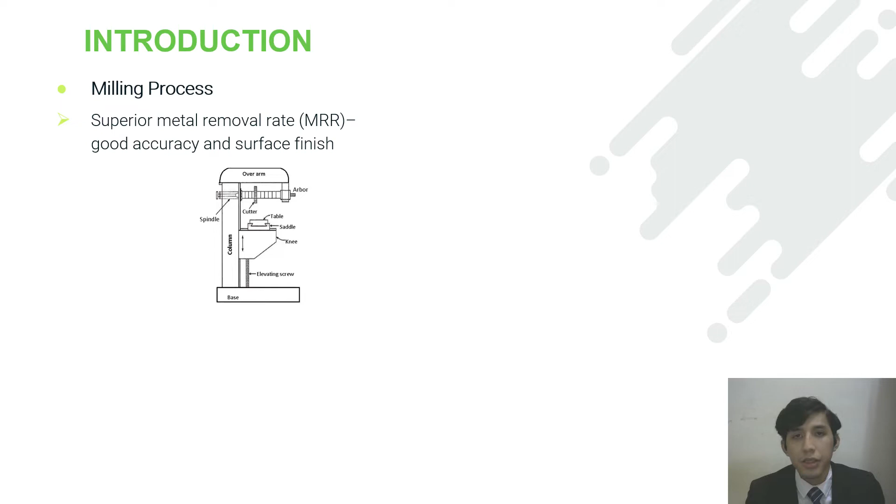First, the project revolves around the machining of milling process. Milling process is known due to its superior metal removal rate compared to other machining processes. Even though it has a good material removal rate, the process still provides good accuracy as well as surface finish of the workpiece. As milling process is a conventional process which requires a physical cutting tool, the contact of rotating cutting tool and workpiece during the cutting process will result in friction, which then leads to heat generation.

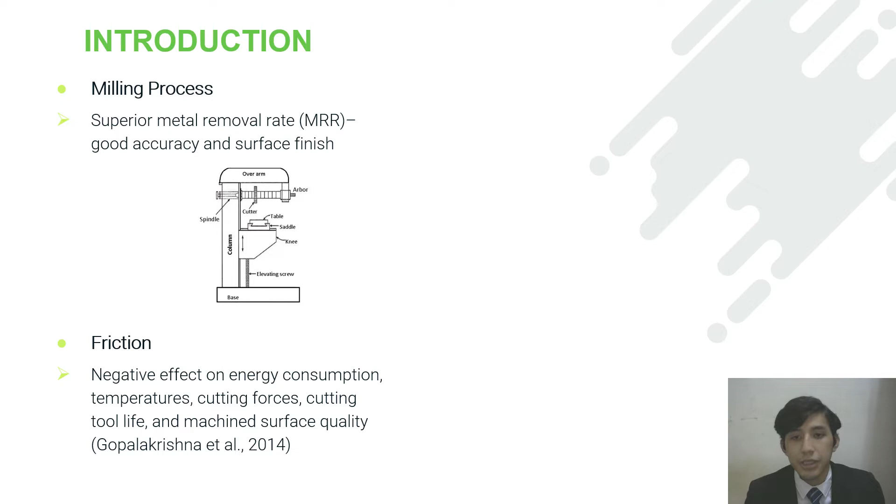As stated by Gopalakrishna et al. 2014, friction affects machining in negative ways on energy consumption, temperatures, cutting forces, cutting tool life, and machined surface quality. Hence, this is where lubrication is applied at the contact point of cutting tool and workpiece during the cutting process. Sloman stated that application of lubricant results in increased machining results of dimensional accuracy, good surface finish, as well as extending the cutting tool life.

Cutting tool is important in machining because a bad condition of the cutting tool will result in a rougher surface of the workpiece, according to Krishna and Rao, 2008.

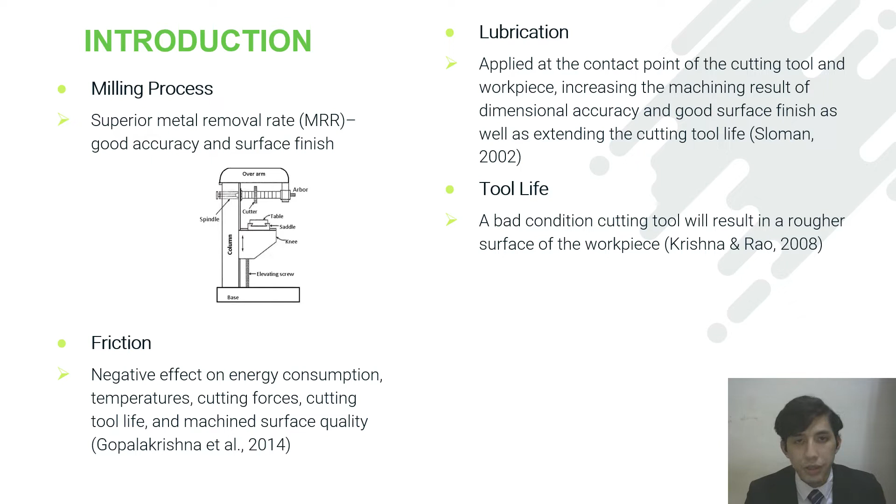Fast forward, recent technology has seen the use of solid lubricant in industry, especially aerospace industry, which requires very precise and less tolerant machine products. Solid lubricant is usually used as a typical composition of a solid, a binder, or as an additive powder mixed with a base cutting fluid such as oil or water, according to Bart et al.

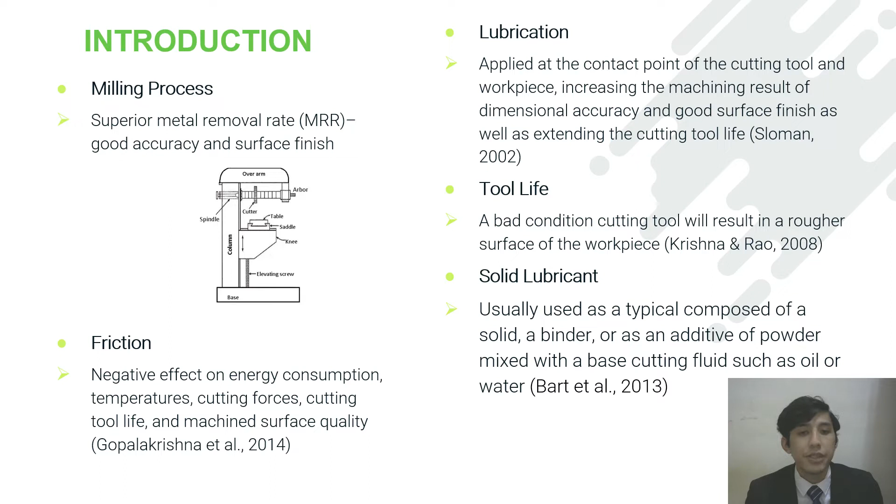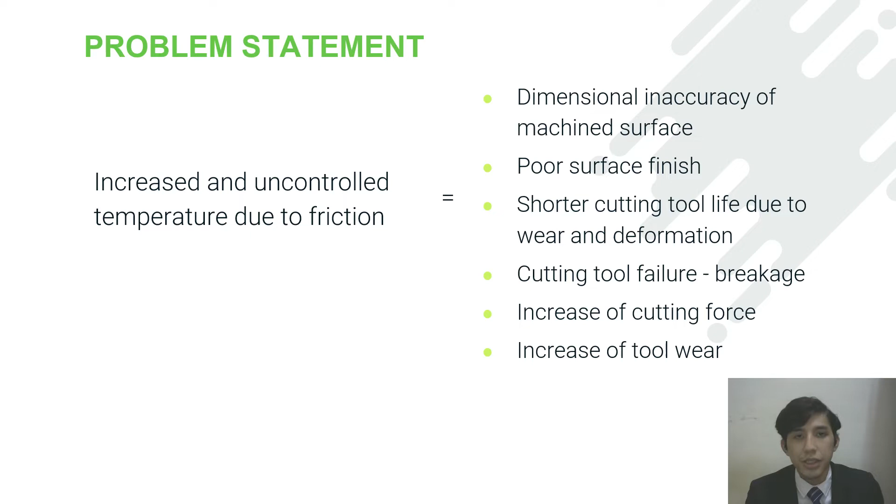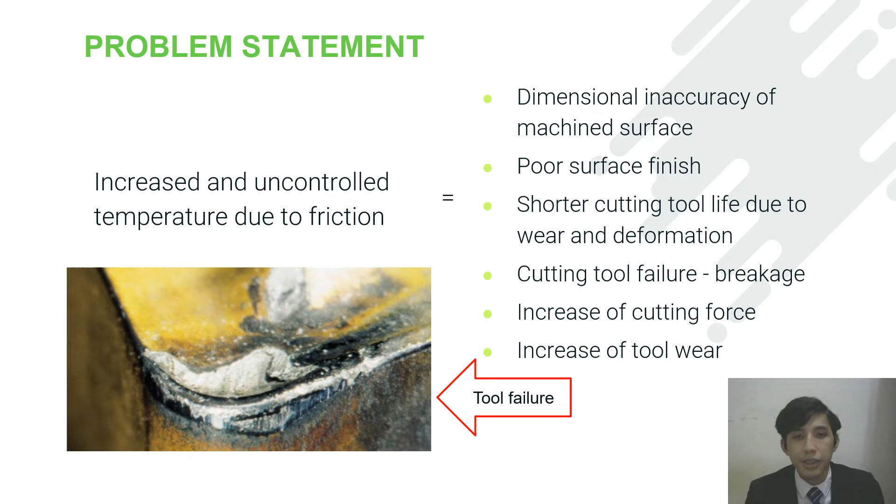On to the problem statement: as mentioned before, friction is a major problem in machining as it causes an increase in the temperature of the cutting tool and the workpiece itself. The increase in uncontrolled temperature will result in dimensional inaccuracy of machined surface, poor surface finish, shorter cutting tool life due to wear and deformation, tool failure or breakage, increase of cutting force, and increase of tool wear.

The objective of the study is to investigate the surface roughness, tool wear, and thrust force during the milling of mild steel by using molybdenum disulfide (MoS2) as a solid lubricant. The second objective is to determine the optimum parameters for milling of mild steel by using a design of experiment of the Taguchi method.

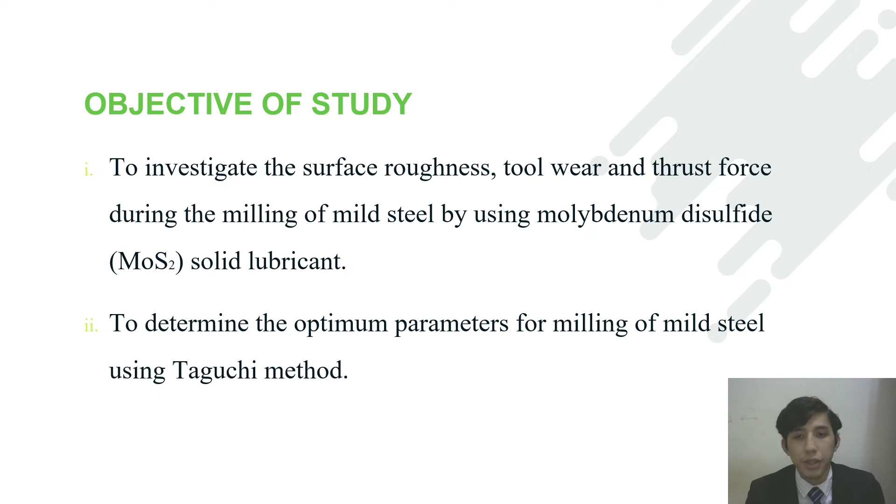This study consists of 4 research scopes: material, machine, parameter, and machining response. For the material, the workpiece that I will use is the mild steel plate. Meanwhile, the powder is MoS2 and the base fluid is palm oil.

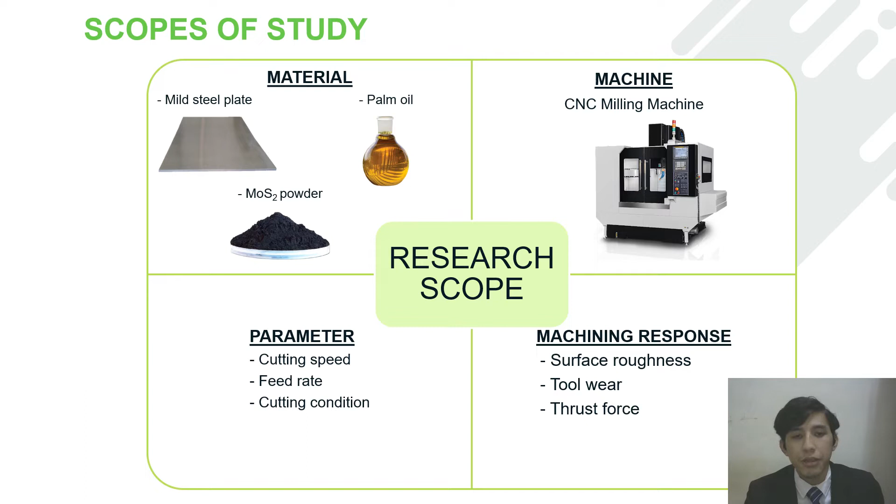The machine that I will use is a CNC milling machine provided by Universiti Teknikal Malaysia Melaka, and the parameters of the study are the cutting speed, feed rate, and cutting condition. The machining response of the study is surface roughness, tool wear, and thrust force.

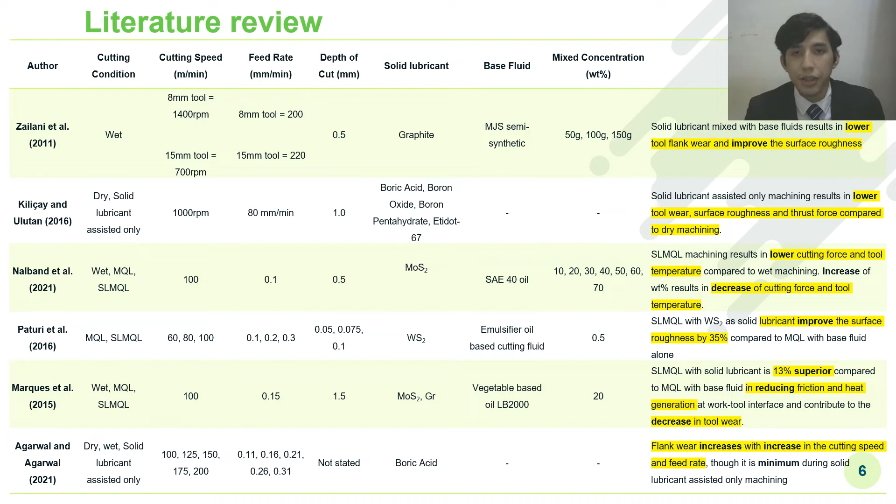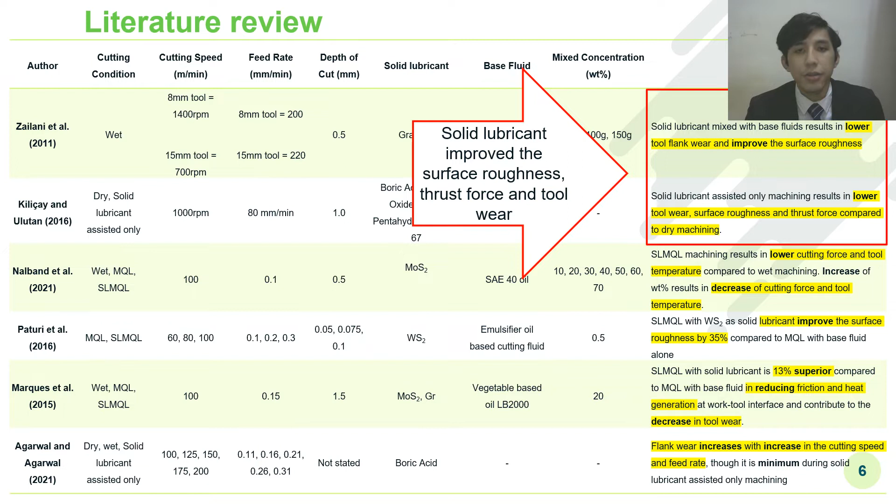For the literature review, I selected 6 previous studies related to the title and parameters of the study. To summarize, studies by Zailani et al. 2011 and Kiliçay and Ulutan in 2016 found that solid lubricant improved the surface roughness, thrust force, and tool wear.

Meanwhile, in other studies by Nalband et al. 2021, Paturi et al. 2016, and Marques et al. 2015, found that MQL condition improved the surface roughness, tool temperature, cutting force, and tool wear.

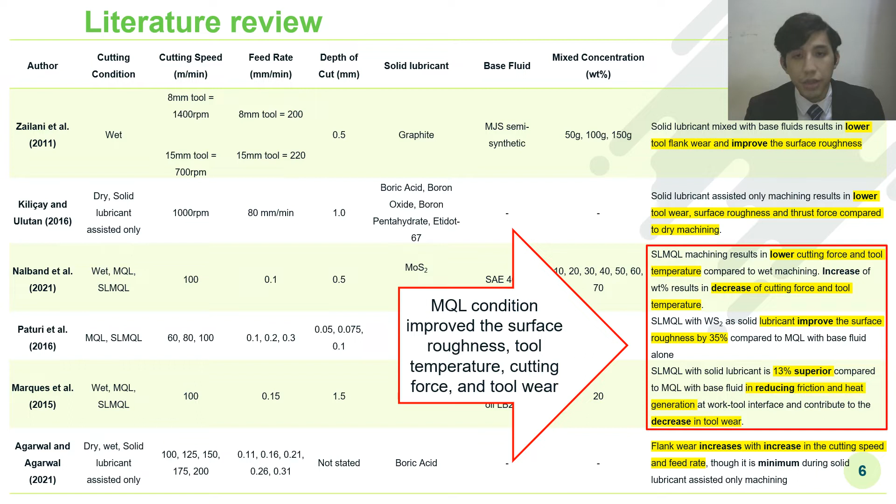And for the Agarwal and Agarwal study in 2021, it was found that increase of cutting speed and also feed rate increased the flank wear of the cutting tool.

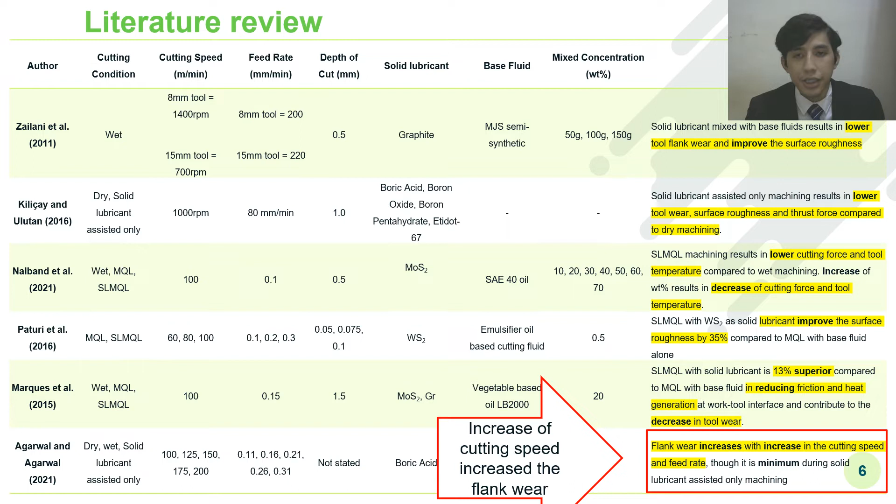Based on these studies, my research gap, according to my current degree of knowledge, is that there is no study on the effect of MQL and cutting speed on MoS2 mixed with palm oil.

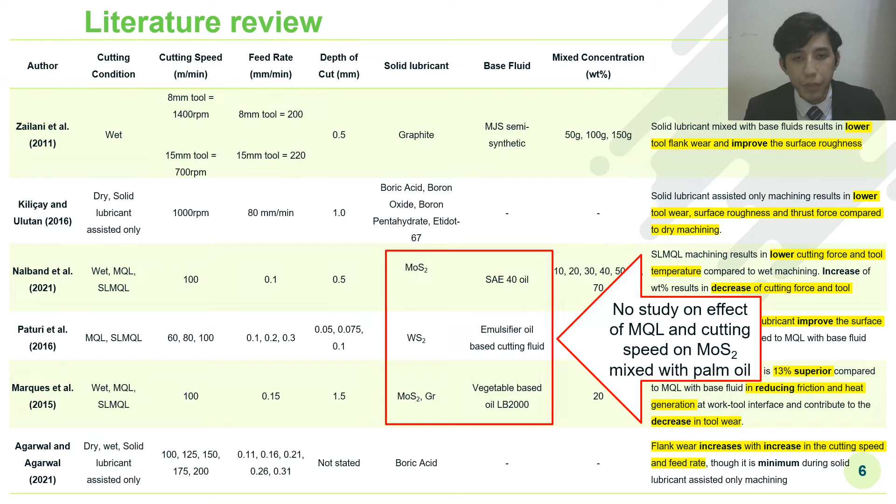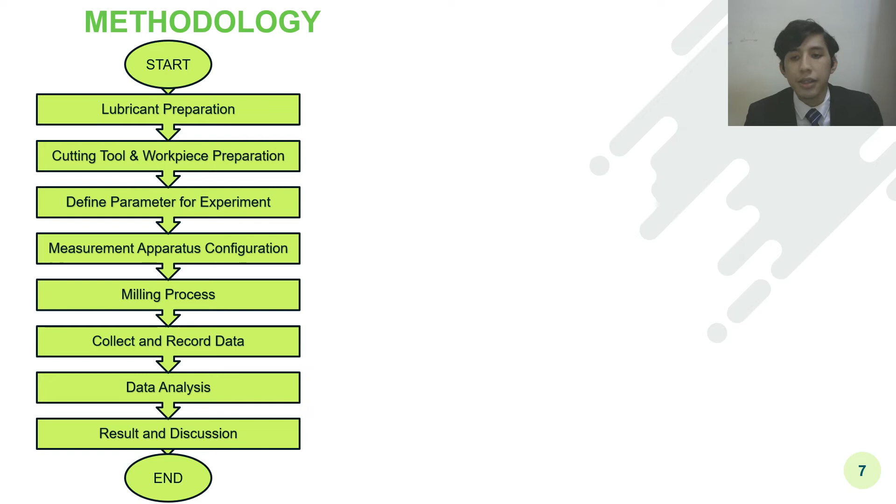For lubricant preparation, the mixture of lubricant I will use is MoS2 mixed with palm oil. The mix will be prepared using the Labsonic ultrasonic homogenizer type P series for a total of 35 minutes with 50% amplitude and 0.5 interval. The particle size of the MoS2 used is 90 nanometers with a mix concentration of 20 weight%.

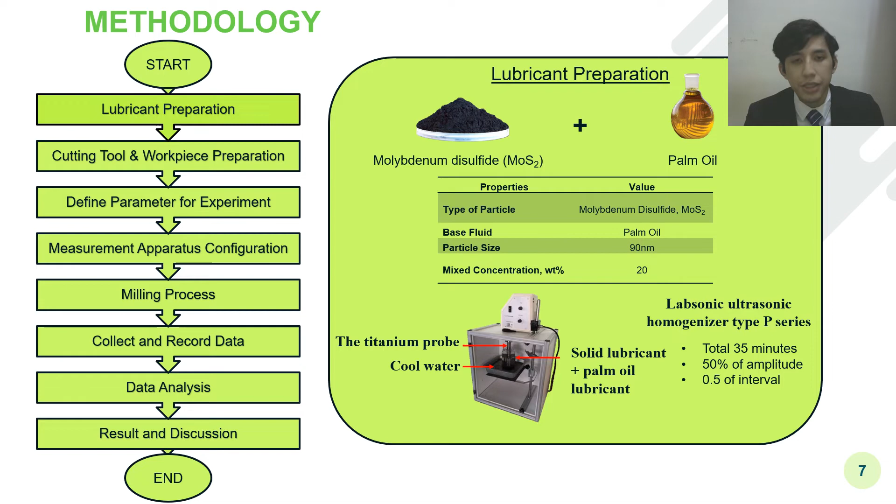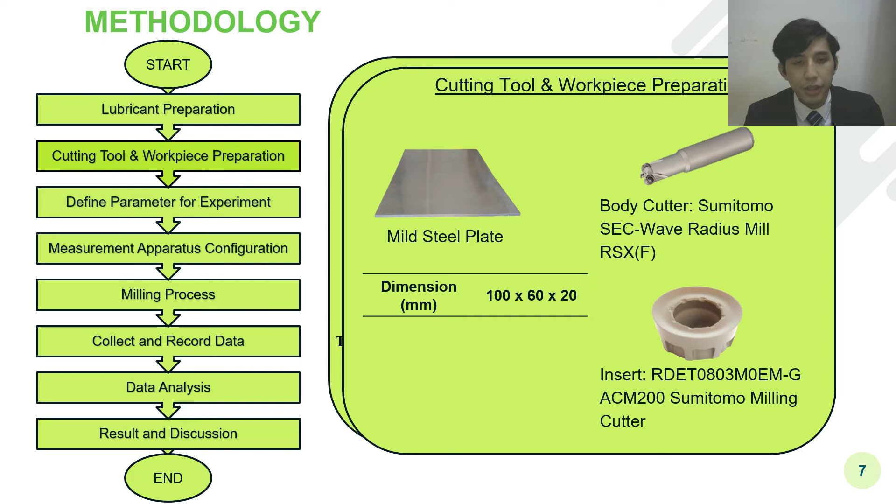For the cutting tool and workpiece preparation, the workpiece I will use is a mild steel plate with dimensions of 100 mm length, 60 mm width, and 20 mm thickness. The cutting tool is a SEC wave radius mill RSX(F) by Sumitomo for the body cutter, and ACM200 grade Sumitomo milling cutter for the insert.

For the defined parameters for the experiment, I will use statistical analysis, DOE, Taguchi method, by Minitab software. The reason I chose the Taguchi method is because it consists of fewer runs, with only 9 runs.

To input into the software, there are 3 parameters and 3 levels. The parameters are cutting speed, feed rate, and cutting condition, while the levels are level 1, level 2, and level 3, as you can see. The cutting conditions are dry, MQL, and SL-MQL, which stands for solid lubricant minimum quantity lubrication.

For the measurement and apparatus configuration, the purpose is to get a more accurate result and less probability of error. The measurement apparatus is used to calibrate the equipment and configure it within an acceptable range.

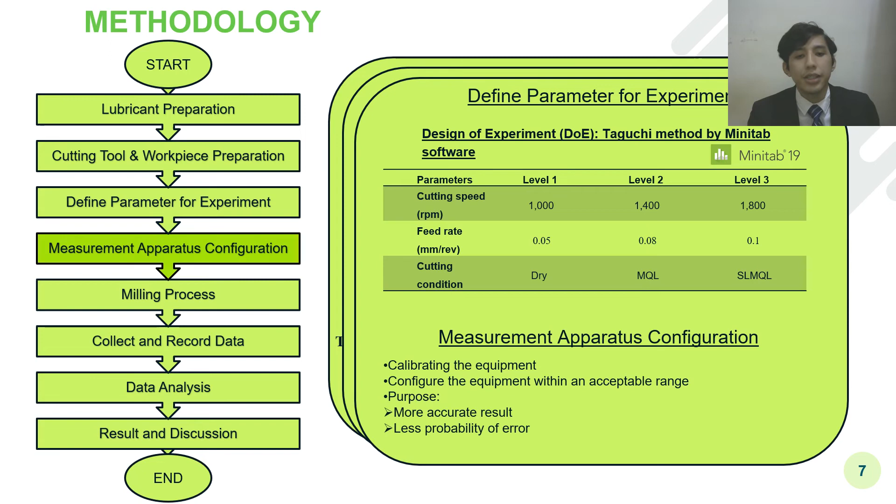Then the milling process, which I will do next semester, follows this experimental condition: the depth of cut is constant at 0.5 mm and the cutting length is constant at 80 mm per minute. The flow rate will be 150 milliliters per hour with an air pressure of 8 bar.

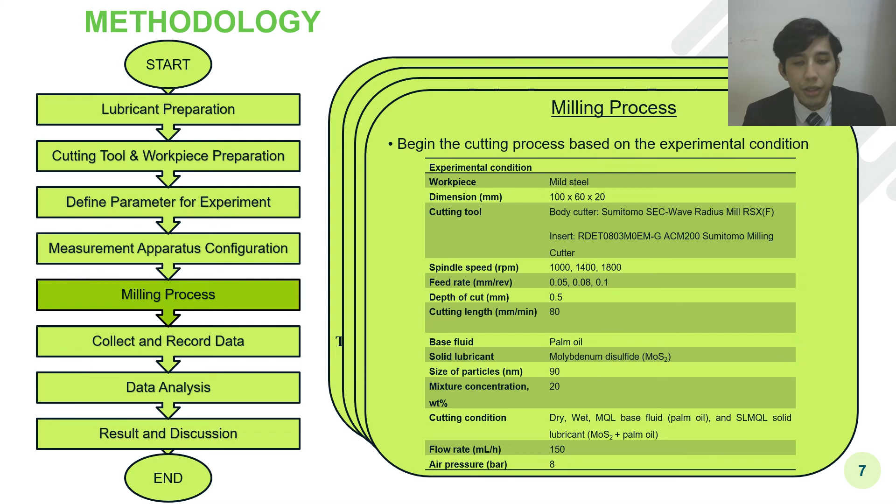To collect and record the data, there are 3 pieces of equipment that will be used: the surface roughness tester, dynamometer, and scanning electron microscope, or SEM.

For the surface roughness, there will be 3 samples and 3 measurements done to get more validated and accurate data, where I will calculate the average of the data.

For the thrust force, the dynamometer will be installed directly on the machine, and it will measure the cutting thrust force in real time.

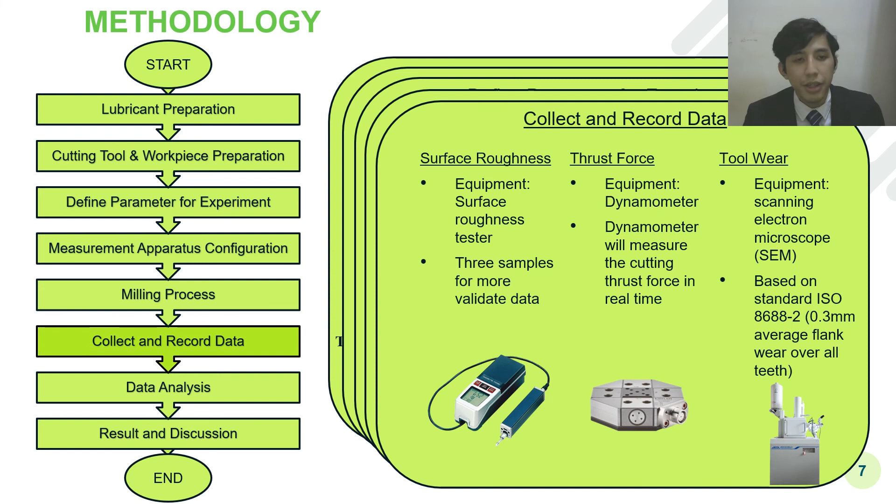For the tool wear, it will be based on the standard ISO 8688-2, where the average flank wear is 0.3 mm over all teeth.

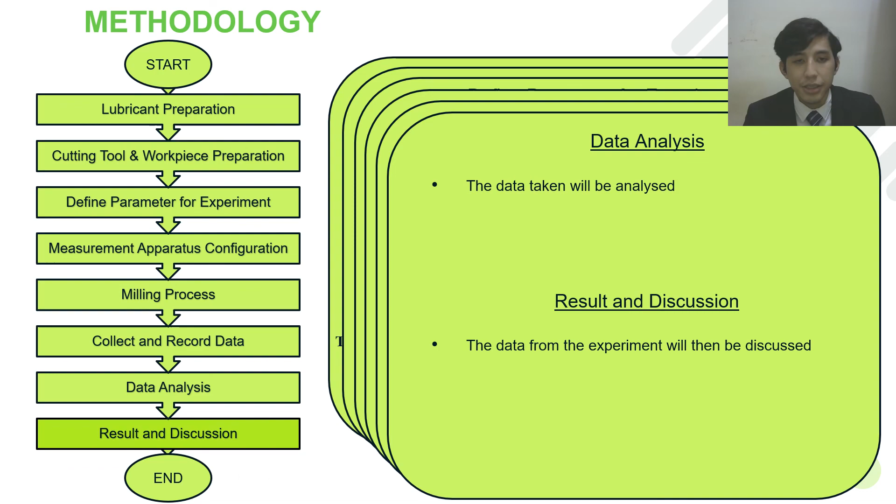For the data analysis, the data taken will be analyzed. I will analyze all the data, and then for the result discussion, the data from the experiment will be discussed. I will discuss this next semester.

Lastly, my expected outcome is that the presence of solid lubricant will result in the best machining response of lower surface roughness, thrust force, and tool wear, and that optimum parameters to reduce surface roughness, thrust force, and tool wear could be obtained. That's all for me.